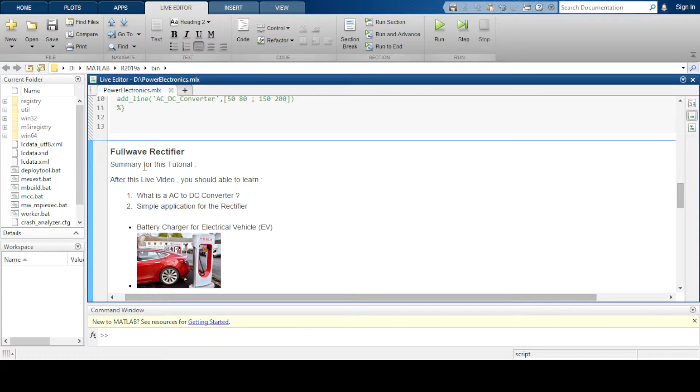It's called a scope meter, or I will say it's an oscilloscope. For those who study electronics, you will always use this oscilloscope.

So basically when you come into this Fullwave Simulink setup, you can go to the Simulink library browser to search for whatever you need. If you're talking about power electronics components, I will advise you to go to Simscape components here, look for electrical, then go to the specialized power system to look for the components you really need.

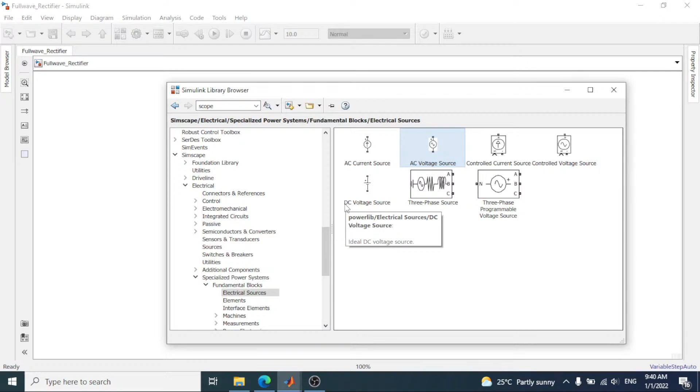I will come again one more time, I think it's a bit slow. I'm able to bring out the scope, but I haven't been able to bring out the AC source.

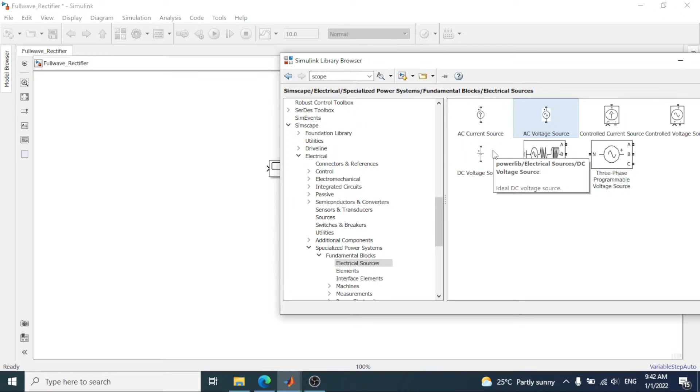I just would like to explain what the AC source is. Maybe I'll do a simple connection here. I find an interface element, I find an RLC branch. I just would like to share with you all how it goes.

I will press Control R to rotate the element. I just wanted to show you what the AC source is, but today our focus is not this.

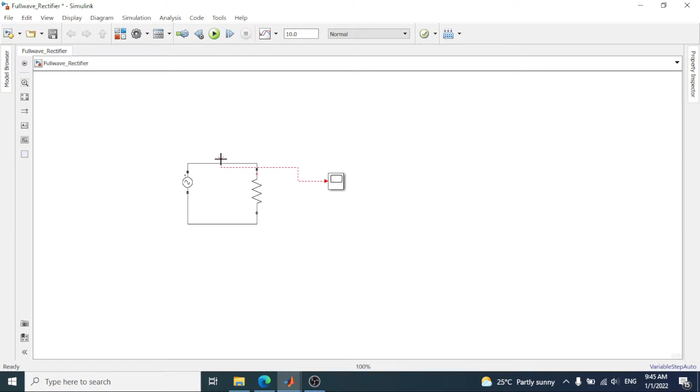Okay, let me set a voltage source to 230, Malaysia's one. So we are in the 50 hertz. Why I put the square root 2 in here? Because it's a peak voltage, it's a peak voltage.

I also will start to measure the voltage in here. I will measure the voltage in here, and I will press the... okay, so I will find a multimeter.

If you want to find some element, you can press the element in here. Like if I want to find a 'go to', then yep, it will be easy. You can drag like this, find 'go to'. So for a 'go to', it must have a 'from'. Because if you want to go to this A point, it must go to this A point from this A point.

So this multimeter, basically just now I've been showing up in here, which is where we have done the measurement. So I will try to display the measurements back to the multimeter first. Then the multimeter is basically like a probe, like a probe for the oscilloscope.

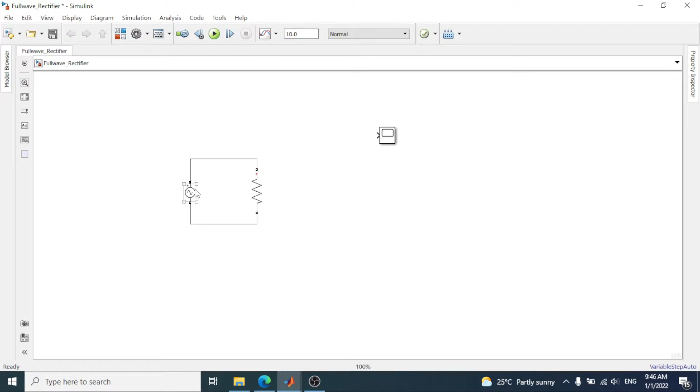If you have used the oscilloscope before, for sure you will know. An oscilloscope basically has a probe. You need to probe the voltage. Then after you probe the voltage, you can display it out on the oscilloscope.

Same goes here. We will use the multimeter to do the measurement, but after we do the measurement, if you have the multimeter, you will also have the probe. You need to probe on the voltage, whichever location you would like to measure.

Same goes here. Today I would like to just show you what is the AC source. That's why I am trying to probe on the AC source there, to look for...

Oh, can't do it this way also. Once again, it can't do it. I think there's still some technical issue in here.

Bear with me. Maybe we don't want to use the multimeter, because every time when I go live, I couldn't use the multimeter. You have been joining me continuously in here, so you know this issue very well. But basically I will try, I still need to figure out a way to solve this out. If whoever knows how to solve it, you can comment it down below to let us know how to solve it.

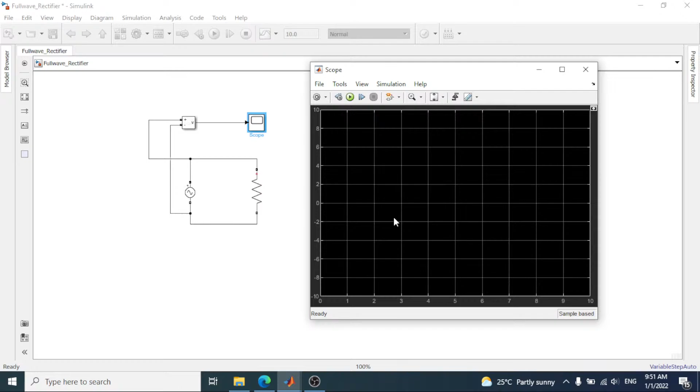Sorry, we are leaving out the powergui component. One very important thing you all have to always remember is putting down the powergui component in here. Today I will show you in the continuous mode.

We will also talk about the discrete mode after this. Discrete is much more advanced, but since today is our first day in 2022, I will say it's a great year ahead, so do bear with us. We will continue using the continuous mode here.

If you are not familiar with continuous or discrete, I will specifically do a video talking about the comparison between the continuous and discrete. Do stay tuned to our channel, and you will know much more after this.

Once you have the continuous, basically we have three simulation types: continuous, discrete, and phasor. I will create a video purposely to talk about these three things - what is continuous, what is discrete, what is phasor - so you will know much more after this.

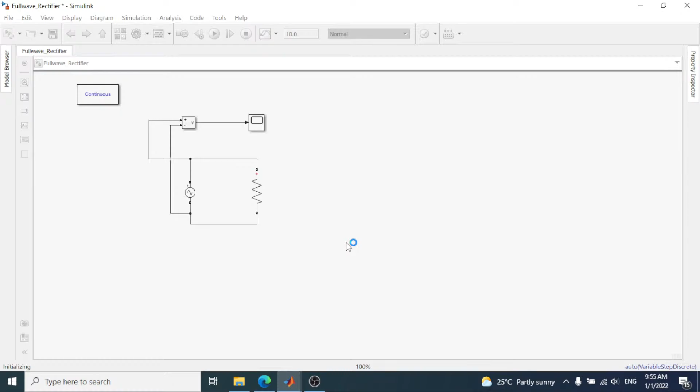We will add it. So we can open again here. Oh, quite long, so sorry.

Point two - this is for setting up the timer. I just want to do a quick run here to show you. It's a bit poor, I think some setting is wrong.

When you do the continuous, you also have to go for here. What I advise, if you don't do this - when you want to see a good simulation, you need to set the setting correctly. So bear with me, we will do it one by one.

Here I will try to use the fixed step, try to use the ODE 23, so that you will see a very smooth sinusoidal wave, because just now the AC source basically tries to generate the sinusoidal wave.

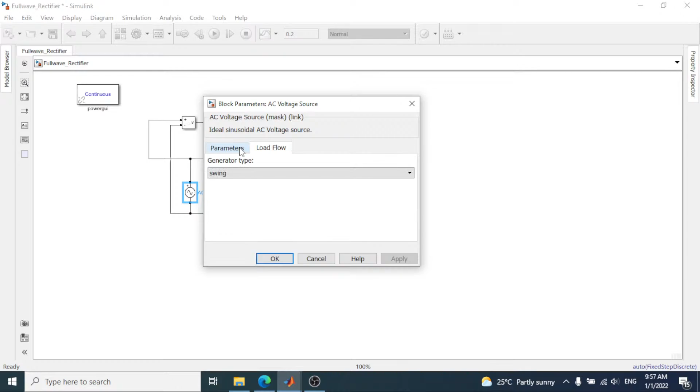We will try to run with a fixed step. Let us run again. Some setting is wrong. I think it's still in the variable step.

If you want to see fixed step, then you need to go for the variable step setting. Let's check again. Sorry, excuse me. It's still not a smooth sinusoidal wave.

One more thing - do bear with me. The max step size, I think if you want to simulate with better simulations here, you can try to use 1E-6, try to limit the step size so that you're able to see a much smoother, much better sinusoidal wave.

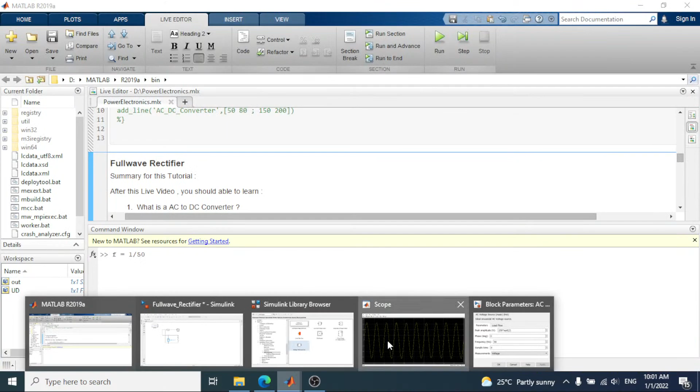f equal to 1 divided by 50, basically it's 20 milliseconds. Within the 20 milliseconds we need to step it out, how many steps. I will advise something much smaller than 20 milliseconds, that's why we are putting in 1e6, because we would like to step every single step size and display it out.

Every single step size in here, so that you can see a very smooth sinusoidal wave. So I will try to demo you, I change the step size to something faster than the 1e6, let me share to you.

Okay, I will close this one. So we go to the setting in here, you can see much more clearer. Just now we are in the 20 millisecond, so let's say I put 1e3 millisecond, okay, so you can see the difference.

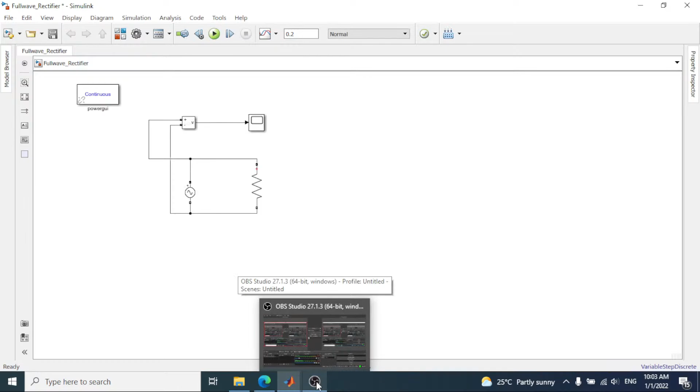It's not smooth. Okay, if I put much more bigger, much more faster than it will become very weird things, 1e2, because the step, it didn't collect the point at all. You cannot take everything much more faster than the 20 millisecond, if not you couldn't see the sinusoidal wave.

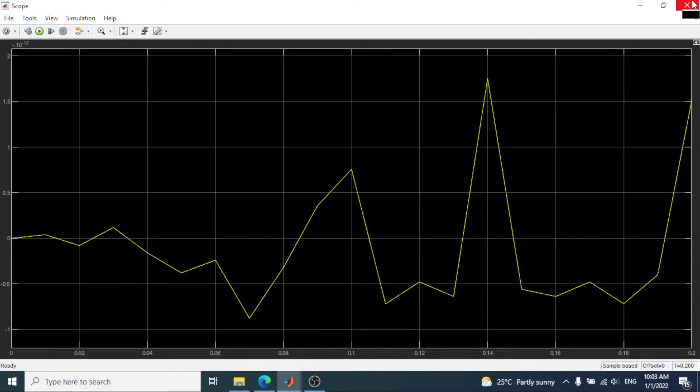So that's why, to get a good result, I will advise you all can do the setting in here, change the setting to 1e6, I think is a good one. But it depends on what kind of simulation that you want to do. 1e6 basically is around megahertz.

You all can calculate after this, or you all can take a tutorial to calculate, because we know our frequency. This command window is hanging.

Frequency, we know the time equal to 1 divided by f. What is 1 divided by f equal to 1 divided by t. T is the 1e6. So it's 1 megahertz.

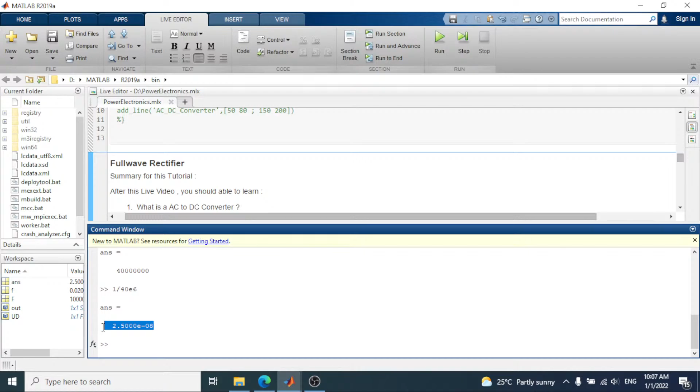Okay, right now you all are familiar with the AC source. AC source basically has a positive part and a negative part. If you call it AC, alternating current, alternating current means they have a positive component and a negative component.

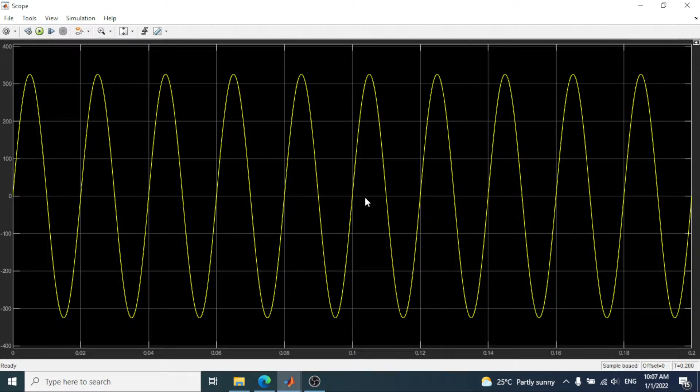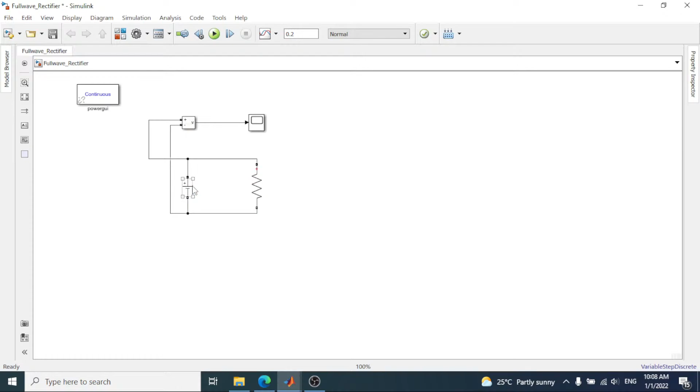Then I will try to show you what is the DC. So we go back to this source, this is the DC voltage source. I bring it out, I remove this AC source, remove this AC source, then I will put it down in here, this DC source, same, maybe I put just now 230 volt.

Okay, so I will run it for the DC source. 230, yes, positive only. This is a positive value only, this is the DC source. Our ultimate goal is to change just now the sinusoidal waveform to something in here, we will change it to be a straight line, which is the DC.

So I think I have shared too much, talking too much about the AC and the DC. So hope you all understand, hope you all can follow. Right now I will go to build a model, AC to DC model.

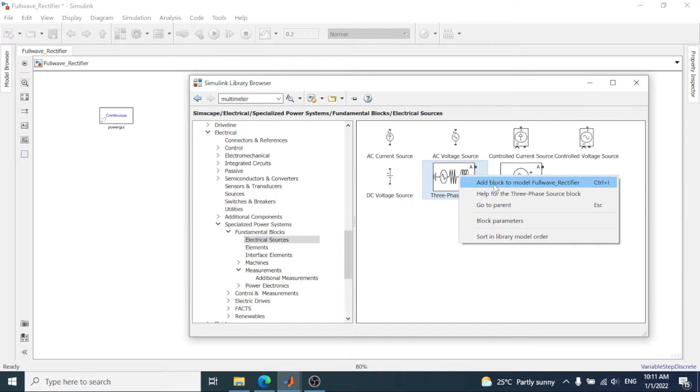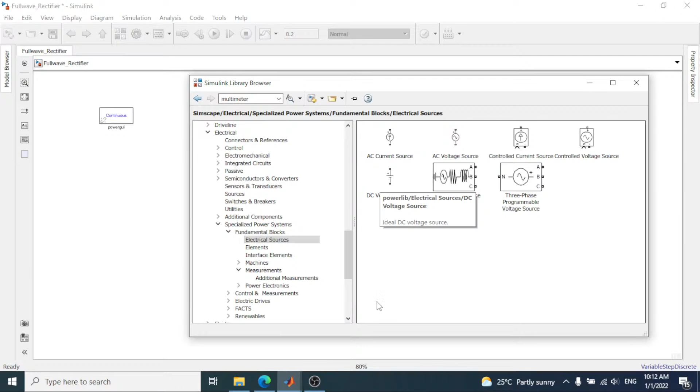You can use this method, add a block to the model, full-wave rectifiers. The full-wave rectifier is basically this here, so I'm adding this block here. You can use this method to call all the components that you would like to use. Later on it will be much easier for you to use it.

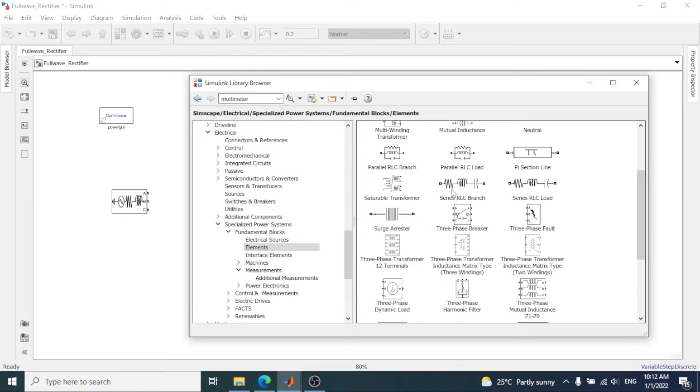Then we want a three-phase source. Definitely we would like to get an element. I always use either the series RLC branch or the series RLC load. But today I will show what these two are, and what the differences are between them.

Series RLC branch and series RLC load. Okay, when you double click here, you can see the setting is in Henry and Farad. Then if you put it in here, it will be for the load. You need to key in the information: what is the voltage, frequency, what is the active power, what is the reactive power, what is the capacitive reactive power here.

For us engineers, usually when we use an item, like today we are bringing in a motor, an induction motor, when we use an induction motor, it will tell you how many kilowatts this induction motor is, then it will show you what the power factor is. But eventually, do you know what the resistance is inside the electrical motor, or what the inductance is, or what the capacitance is here?

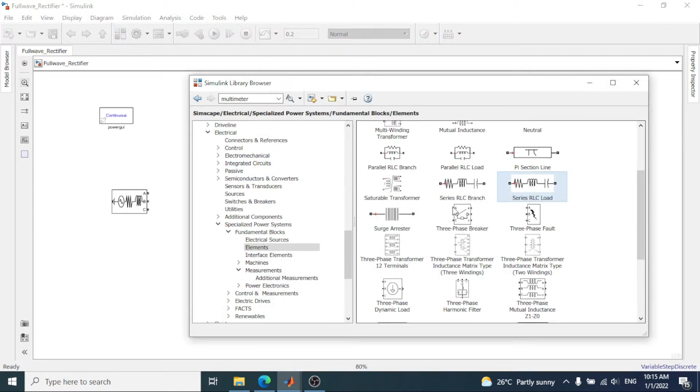So because today our course is talking about Matlab Simulink for the engineer, I will advise you all to use the series RLC load. It will give you a much better understanding here, later on.

Okay, then what else do we need? We will go for the power electronics. Today I will use this, the three-phase bridge first, to discuss with you all. But basically we can use a lot of different types because this is the three-phase, three-level bridge.

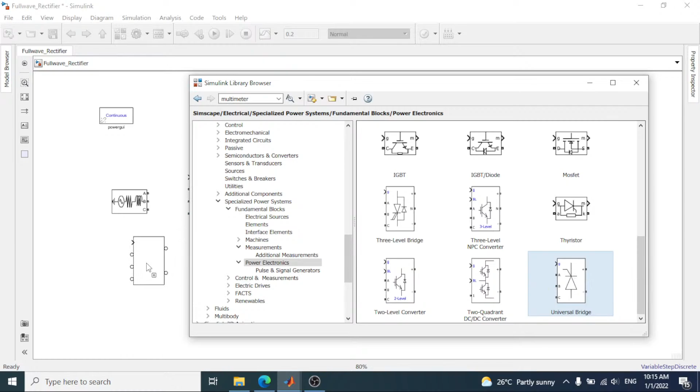Sorry, I think the two-level one is... sorry, I think the universal bridge is much easier for you to follow first. Okay, I will talk about them one by one, what the difference is here, for those bridges, how to use the power electronic bridge.

Okay, so you already have this and this. Then I want to generate the pulse here. Let's say today you don't know how to generate the pulse, you can double click in and go to the help. Basically the Matlab Simulink help is very powerful. It has already documented all the useful information for you to learn how to use the components here. It explains in very detail, but you do need to spend some time to go from A to Z.

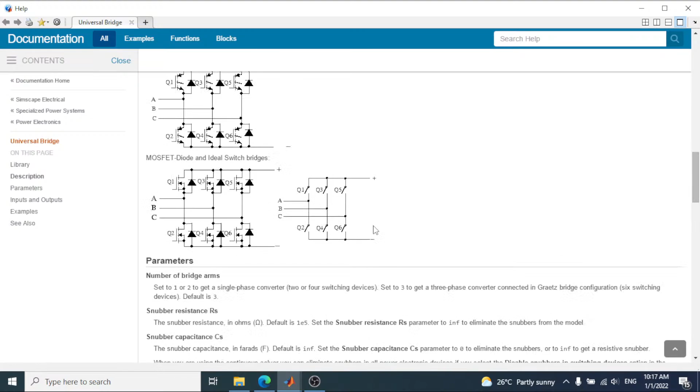Okay, you need to take some time to go through A to Z. So over here you can know what kind of topology that you'll be using, and what is the snubber capacitance thing. You need to go through it in much more detail.

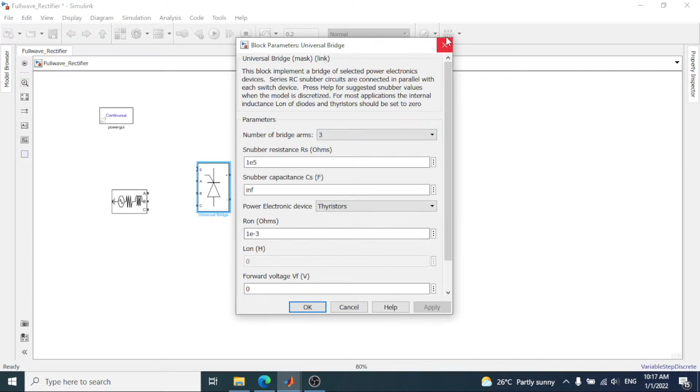Then G is the gate, how we are able to fire the gate. Power electronics is always talking about firing some gate to get something else out. So G basically is the gate. You can see over here the G is a gate. So then we need to understand how we're going to fire the gate, so we need something that can be firing the gate here.

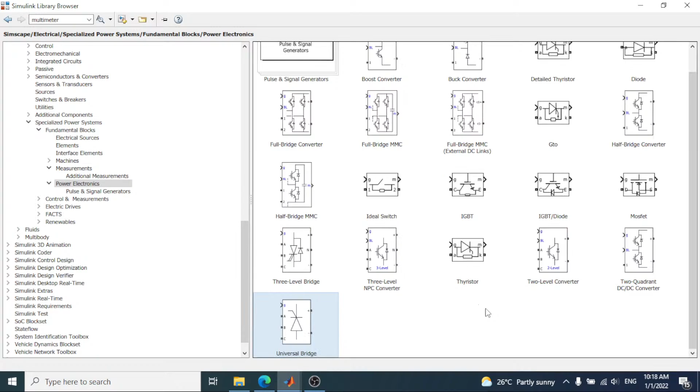We don't need to build it because I know you can build it, but I would advise you no need to build because Simulink has done a lot of very convenient stuff for us. You can see pulse and signal generator. We would like to generate a PWM generator, so I will always use this first.

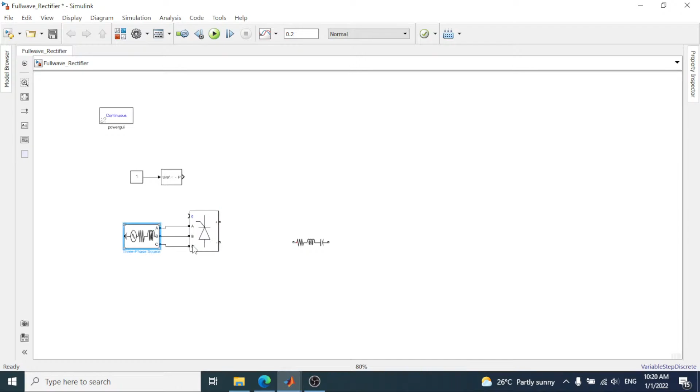For this component, you can press control, then again, then it will be wired off. Okay, seems to go here, seems to go to this one. Let me do it one more time, rotate this. Where is it, okay, so this one and this one, and this one, you press control, you press control, yep. You can route it like this. It's much more simple and easier. Okay, then we are done.

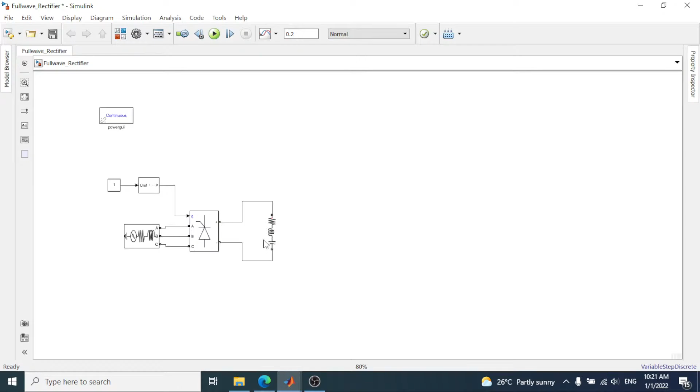We have done this. This is our AC part, this is our DC part. Okay, so we are already done. So I will start with something easy.

So I'll use the pure resistor load. Because when we want to use the three phase, I will use our country voltage. You can use your country voltage also, yeah, from US maybe you can use 380. Okay, you can use your country voltage, depending on what is your country voltage.

Do comment it below what is your utility, which country you are from, and what is your utility company voltage from what utility company. I believe some countries have a lot of utility companies, like what I know in Japan, they have two very big utility companies. Then in Malaysia we just have one utility company. So in some other countries they have two or three, like US. So do comment it down so that we can build a small database here, fast and easy. Because I myself am not familiar with your country, so if you are familiar with your country, you can comment it down here so that we can share this information for the rest of the people who would like to know.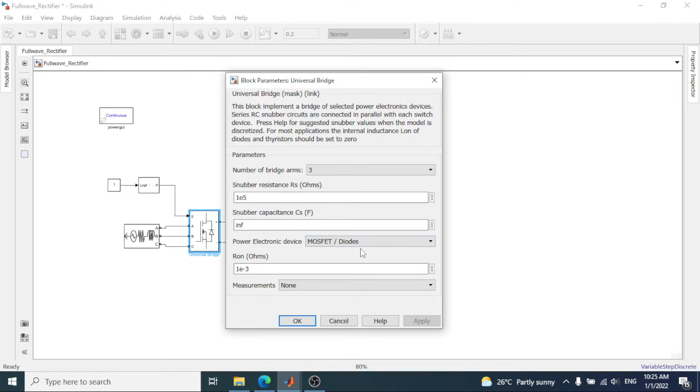Once you all have uploaded your file, I will discuss how to use the IGBT. The IGBT is very powerful, but if you don't want to use it, you can use the MOSFET, which also seems very powerful. So I will start with something simple, starting with the Thyristor, then I will purposely do a video to show the differences between the IGBT, Thyristor, and MOSFET, and how we're going to configure it. Basically we have a lot of topics to talk about.

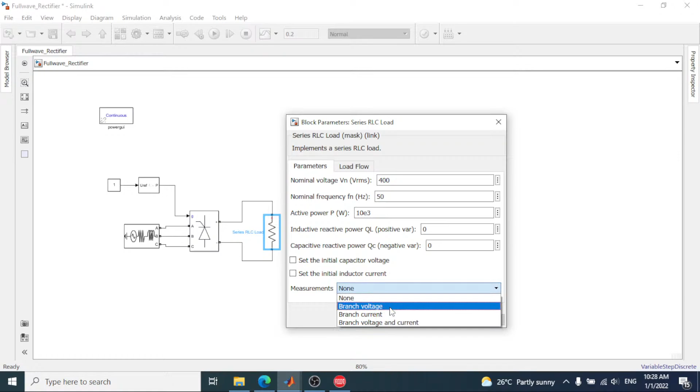So I will apply it. This one has been set, this has been set, this has been set - now for measurement. We can build the multimeter. We need to bring the measurement up.

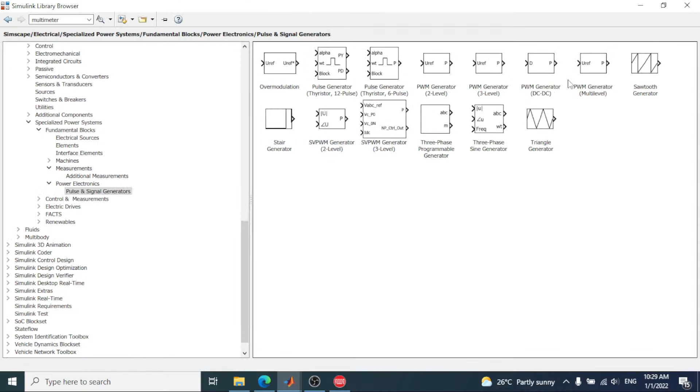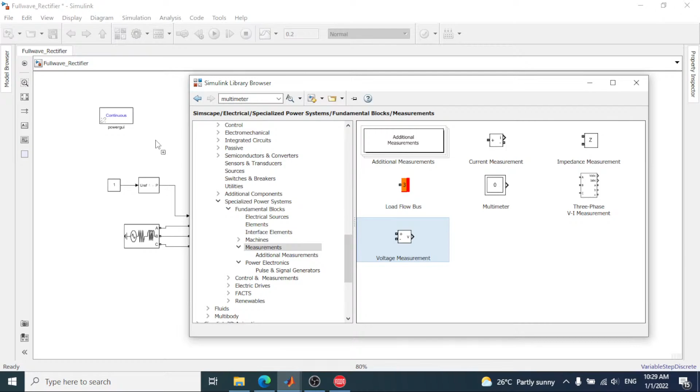So yes, if you can follow along, do follow. Now I want to do the measurement - bring out the scope. I will do the voltage, then the 3-phase - how are we going to measure the 3-phase? We have a 3-phase source here, so you can put it in over here, then connect it here.

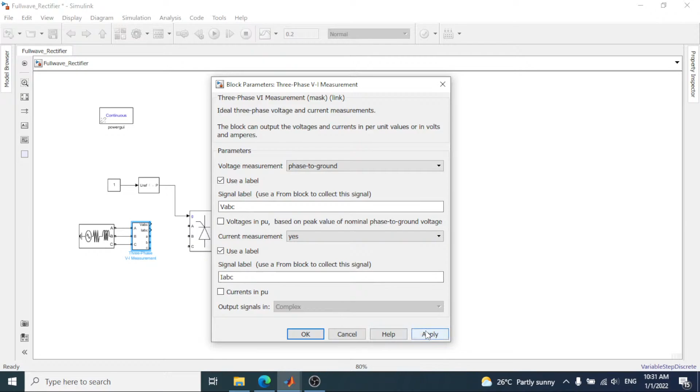Back to this 3-phase measurement - we see here we have VABC, IABC. We can change it to a label, we try to change it to the label, then we will label it and connect it here. You can connect everything like this, but after you already use the label.

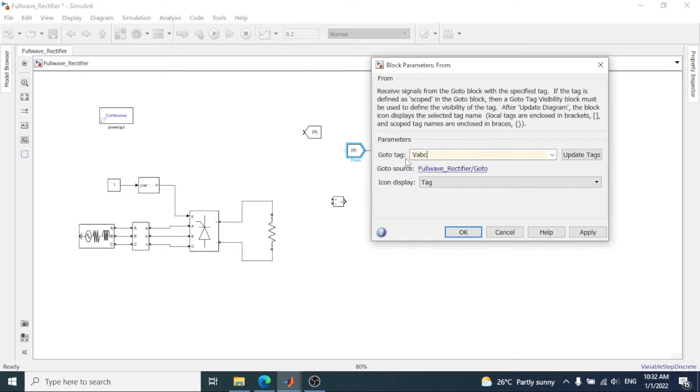So later on you can call out a scope, which is the oscilloscope, as I was talking about just now. For number of ports, I will set it as 2 because I will try to show 2 things. I will use the Go To block, then drag from here. You all will see I have the capital letter VABC - you need to name it like this, so this VABC will follow that VABC. If you're able to follow, this is the 3-phase input voltage.

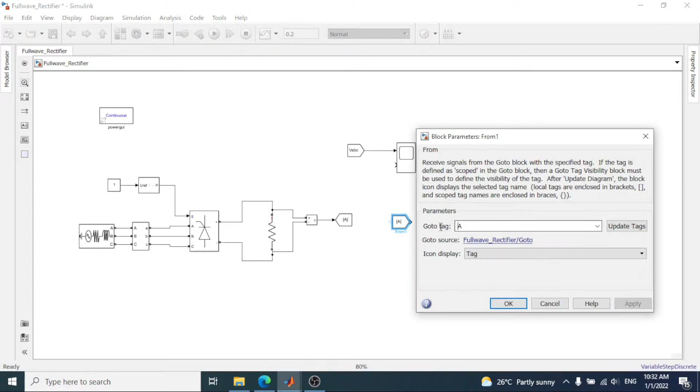Then I need to put in the output. I still use the Go To, and I will name it VDC - this one is the VDC. I always advise you to do something like this: Go To, from the Go To, you put a VDC.

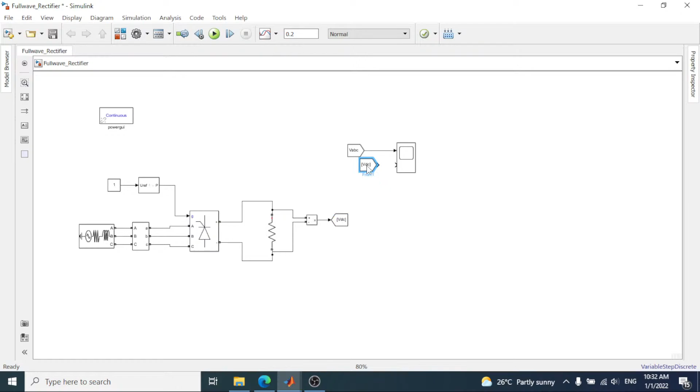Once you put the VDC, you press it out. Then you connect like this. Okay, then let's go to the setting.

Okay, setting. Do you remember? Today, sorry, we will start from the continuous setting first. Then the solver we use is continuous. Okay, then over here...

We need to wait, so bear with me. Computer is a bit lag. Okay, so use the continuous solver. As I discussed with you all, we have a 3, but today we will discuss the continuous.

Okay, so our ultimate goal is we would like to use the discrete, because later on we will build the full controller to control this bridge rectifier, this AC to DC converter, for automatic control.

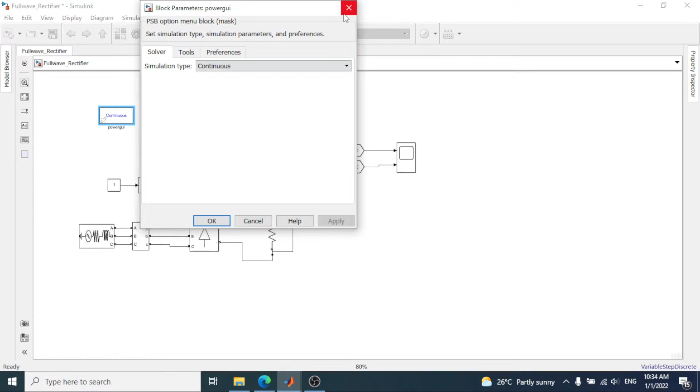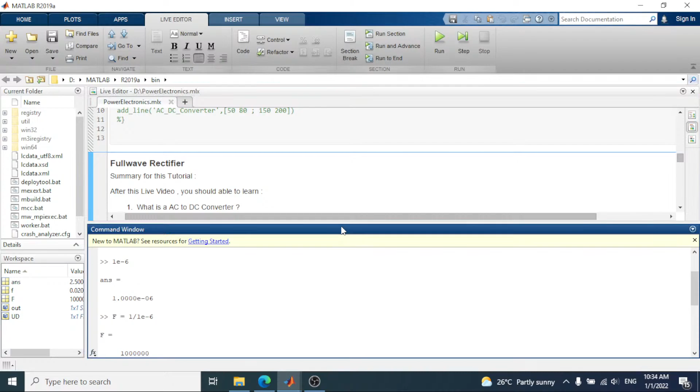Whatever you see from the very beginning, what we're talking about, where you're able to use it, let me share again in here. Okay, if you're able to see from my live script in here. Okay, so what are the applications for the rectifier?

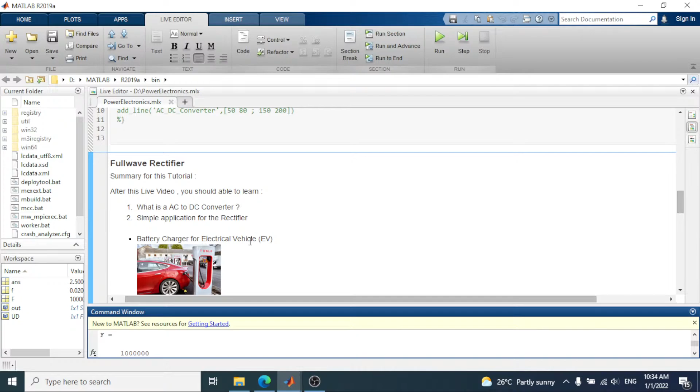Okay, it can be used as the battery charger for the EV. Okay, Tesla EV. Okay, you all can use it as the Tesla EV.

Then if you build like this from Matlab, basically we can build this out. If you all know, then at the end of this course I will try to show how to put all the code to the controller. I will try to share it with you all. Stay tuned to my channel to learn it.

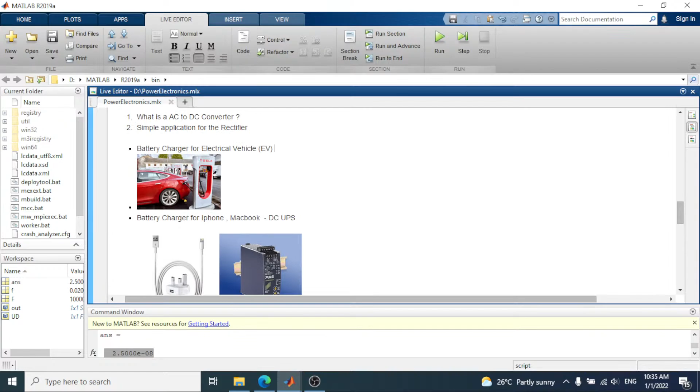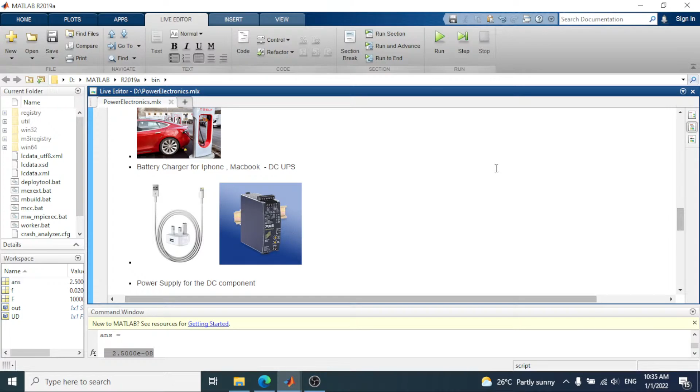So if you say this battery charger for the EV car is too huge for you to build, you can build a simple battery charger for the iPhone, MacBook, and the rest of the things. You can see a battery charger for the iPhone or a DC UPS for the DC component. Then you also can use the AC to DC converter to build the power supply to some DC component that you can use.

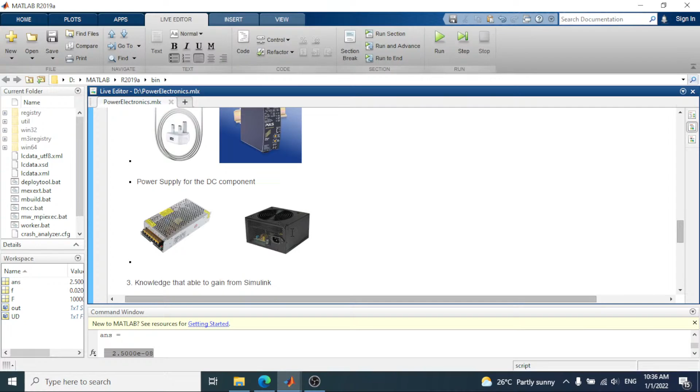Then, how to say, the power supply for the computer.

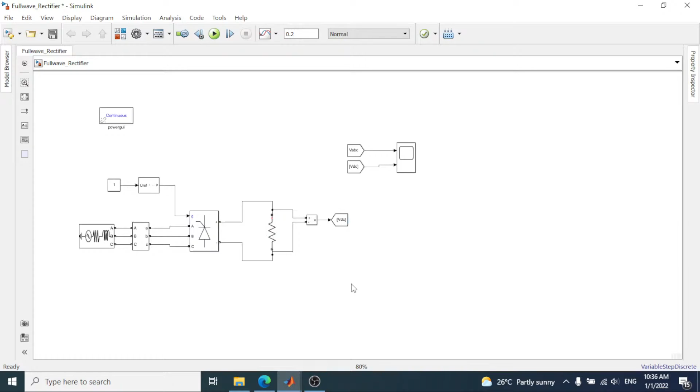Yep, do bear with me. Okay, then we can go back here about the setting. Just now we talked about the setting. I think we've discussed it a bit already. If you all cannot see, we try to zoom it out so it's easy for you all to see all the components and how we're going to wire it out.

Maybe I'll start. It's a bit hang.

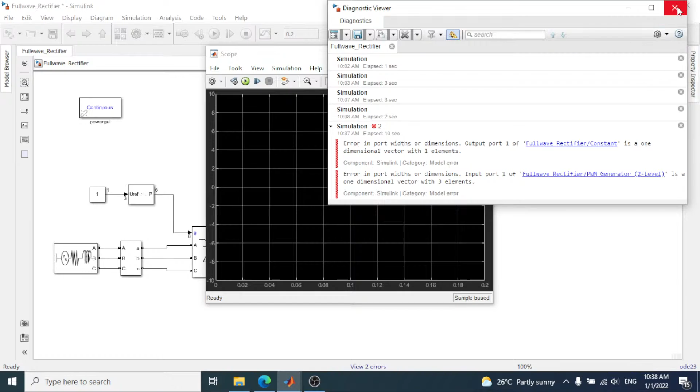The dimensional. Okay, you need to use the multiplexer.

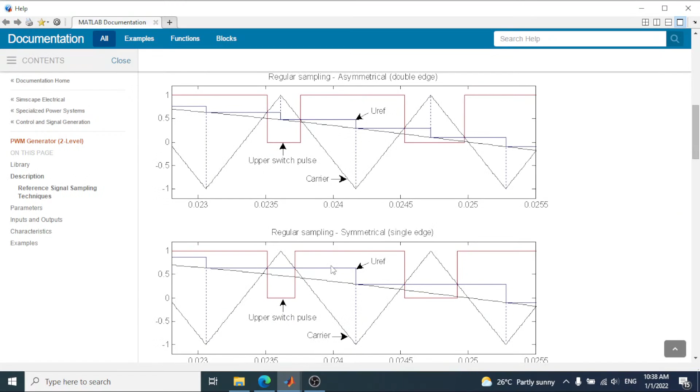Sorry, here, not this. I always say, if you don't know, then go to the help. They have a lot, tons of information that leads you to the correct way of how to set that dimensional thing.

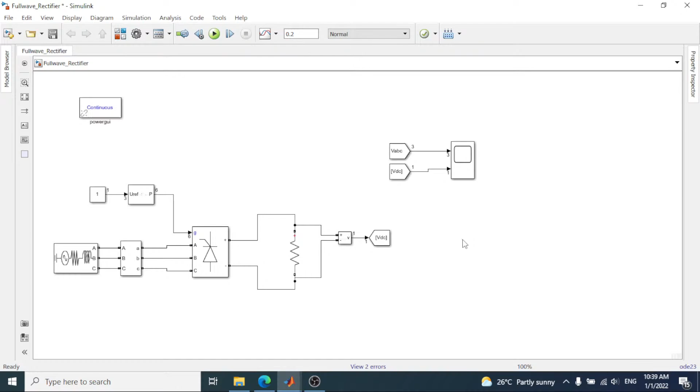Basically it's like this. I can use the Demux. Yeah, you can use it from here. You can use it from Demux.

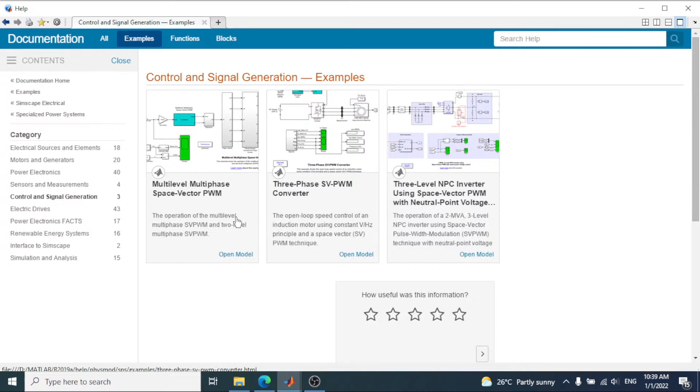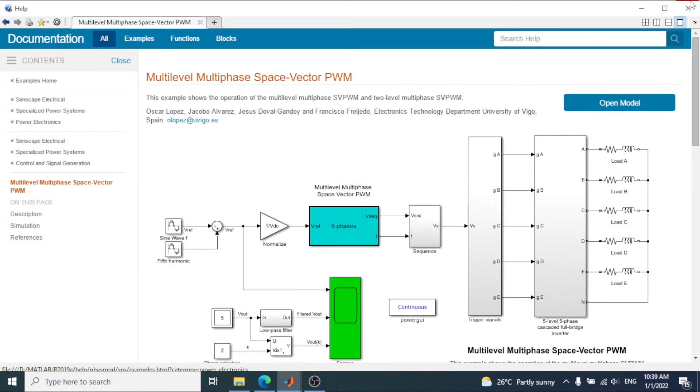If you're able to see the example, yeah, you all can get some example from here. If either one, sorry, not this, here.

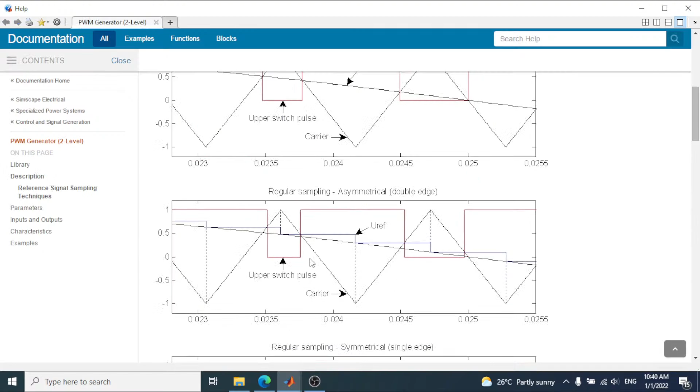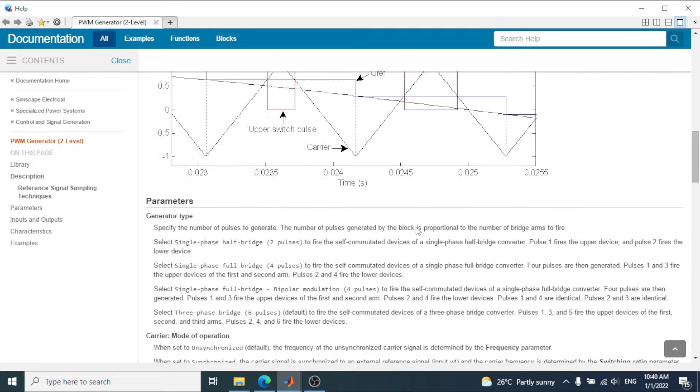You all can open this, the example in here. You all can follow the example in here, so it will be much easier for you.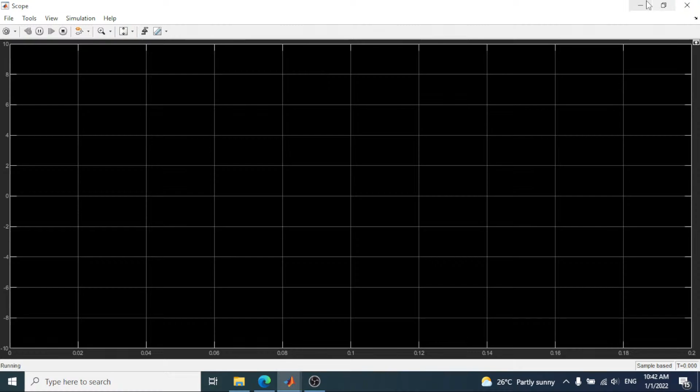It's a bit slow, it's a bit slow. Yeah, if it takes some time, it takes some time. Okay, hope you all can bear with me, still stay here to learn this.

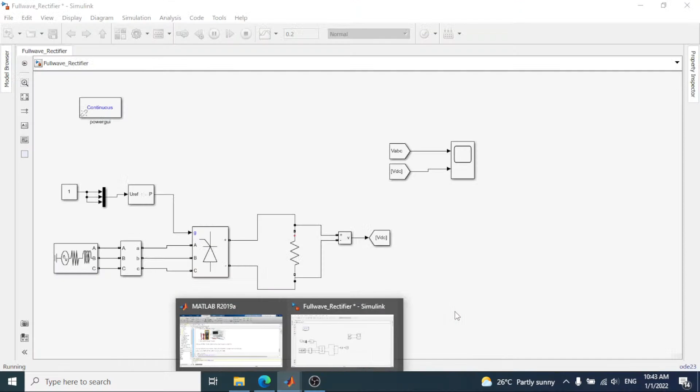I think it's so slow, too slow, too slow. I think it's too slow to make on live. It's too slow to make it on live.